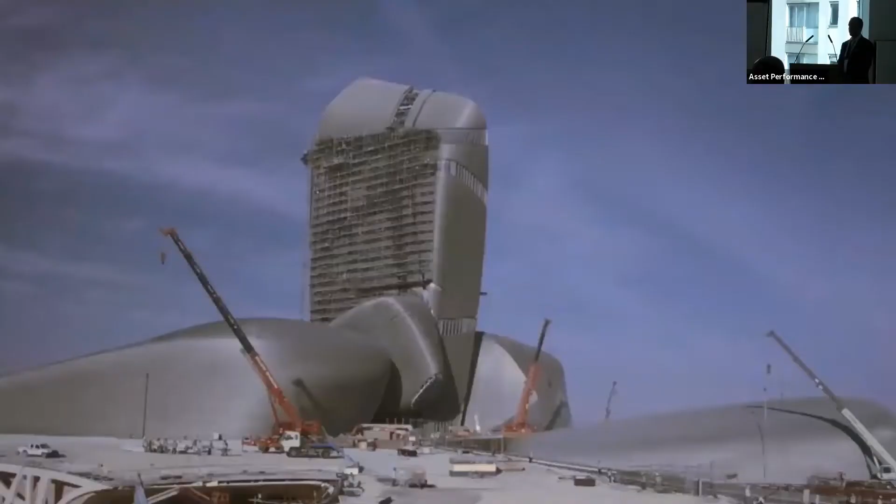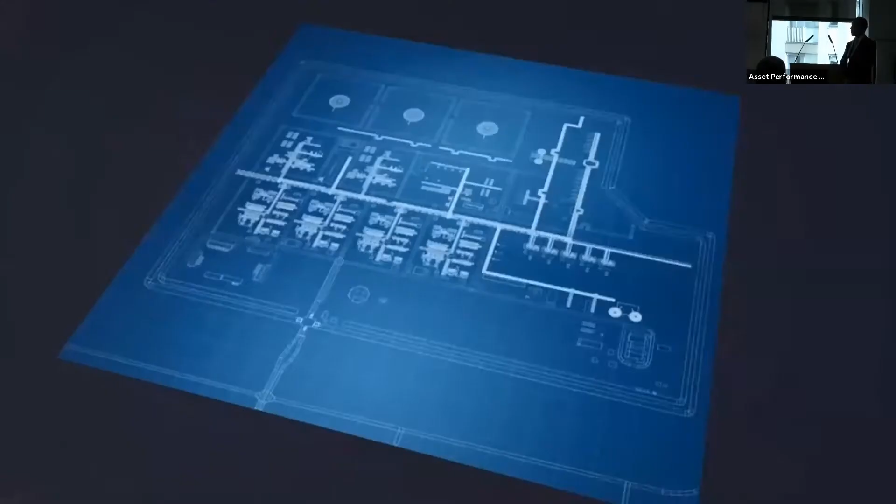Saudi Aramco is no stranger to the extraordinary. As the largest oil producer in the world, it is used to doing big things. The world relies on oil for energy and the thousands of byproducts that enhance our daily lives. Every day, millions of barrels are extracted from reservoirs deep beneath the Saudi Arabian desert. Demand is relentless, and thus the Khurais Central Processing Facility was built to enable the largest increase in oil production the world has ever known. The Khurais Mega Crude Oil Incremental Program.

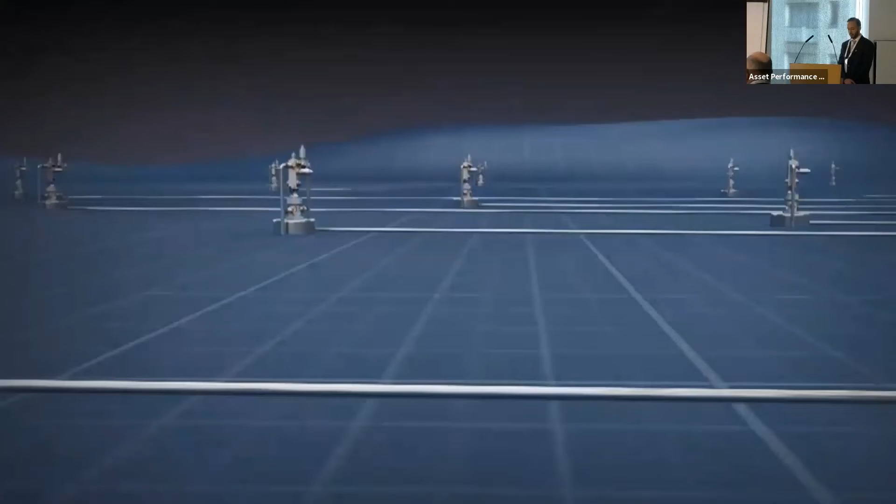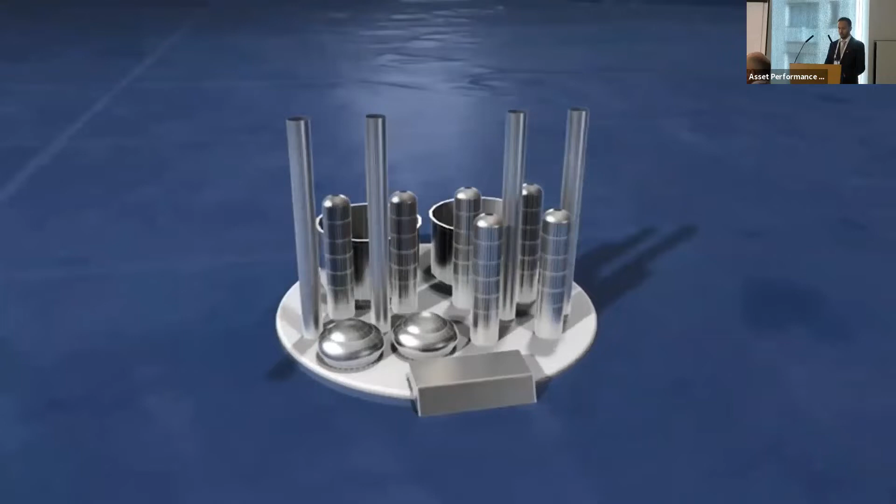The facility receives oil from 3 separate fields. The first field, Khurais, was discovered in 1957, followed by Mazalij and Abu Jifan in 1972 and 1973. These intelligent fields house over 300 advanced oil wells. However, oil direct from the ground needs to be processed before it can be used. Using the latest advances in technology, the Khurais facility was designed to process increases in oil production from the 3 fields at a single central location.

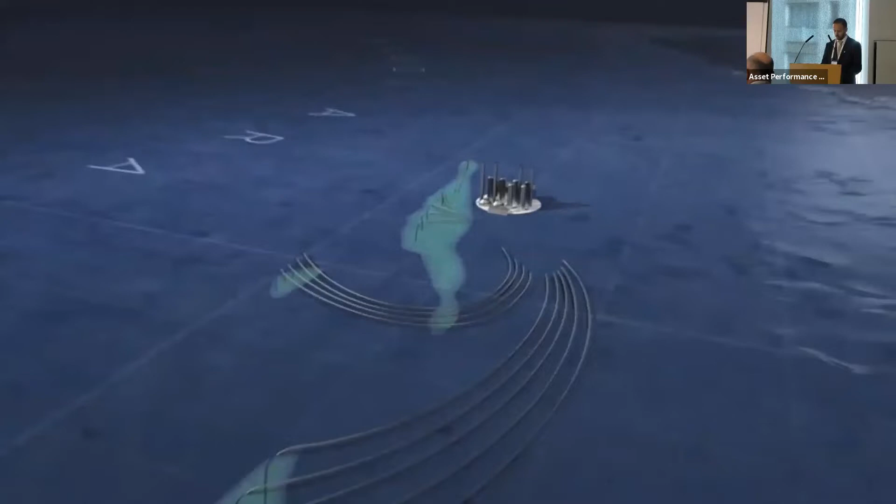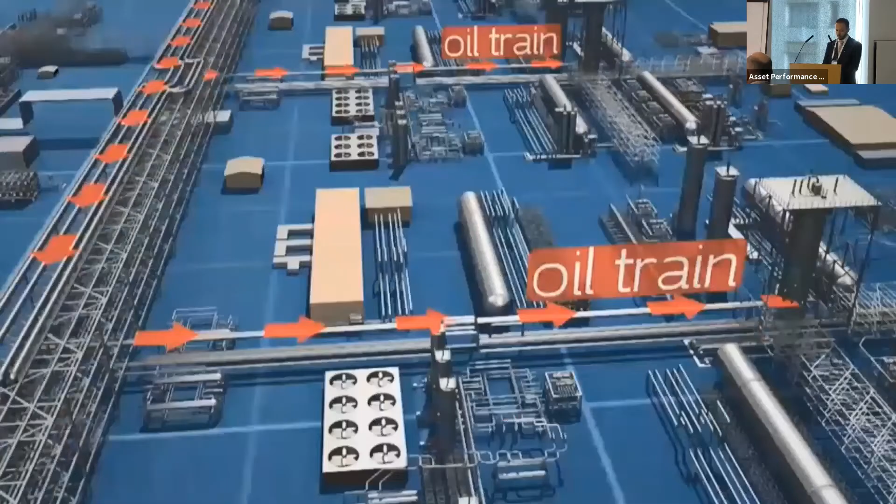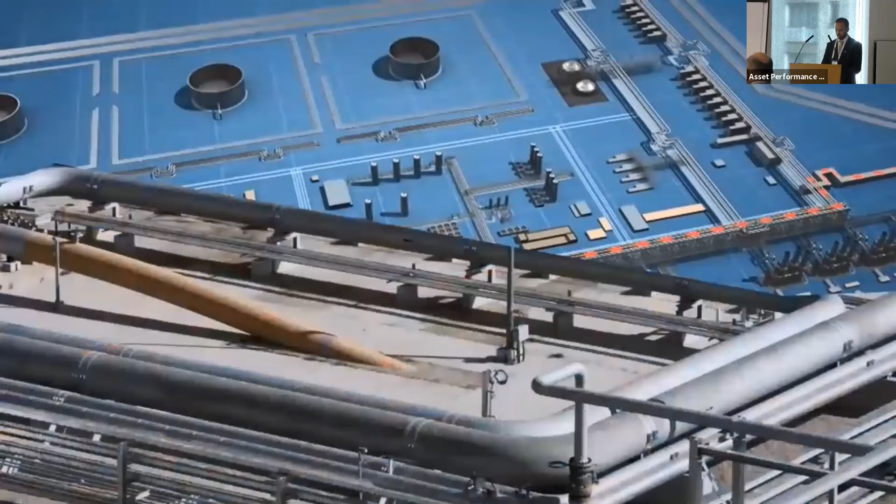Wild or untreated crude oil is diverted into one of 4 identical oil trains, where it is treated and separated into oil, gas, and water at our separation plants, known as GOSPs. Once stabilized and cleaned, this oil is piped across the kingdom to Saudi Aramco's terminals for export, while a strategic reserve of 1,800,000 barrels is held in 3 large storage tanks in the Khurais facility itself.

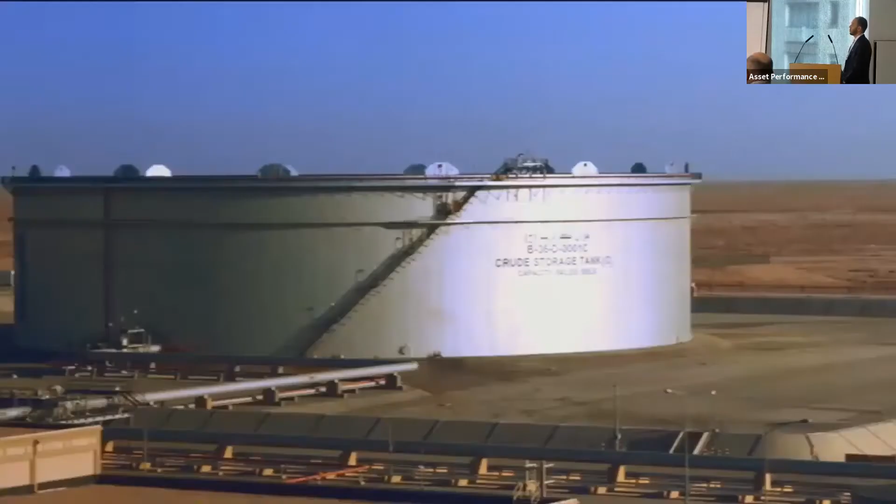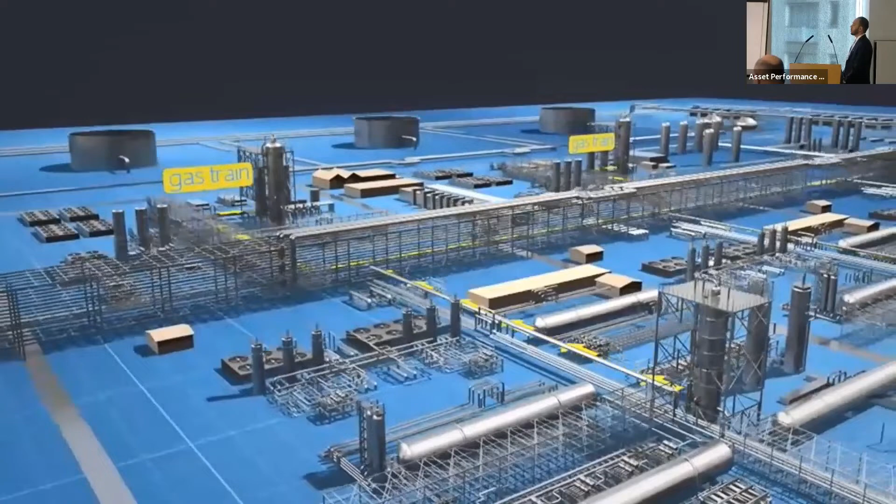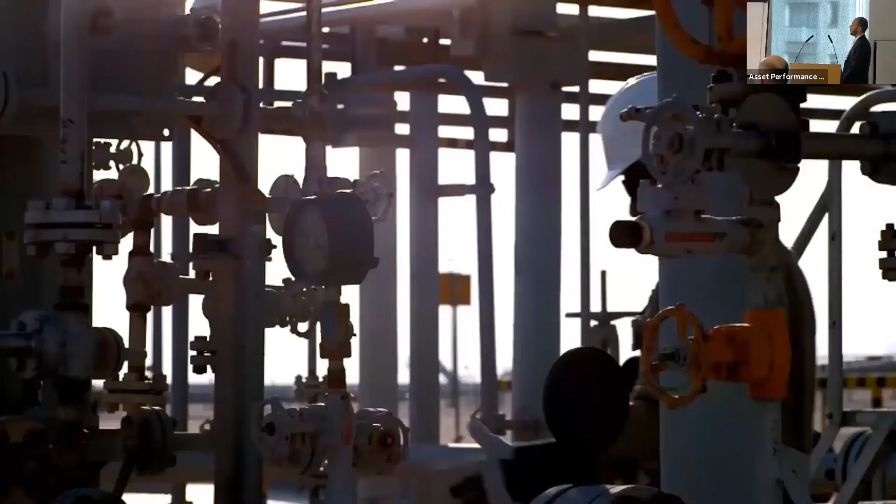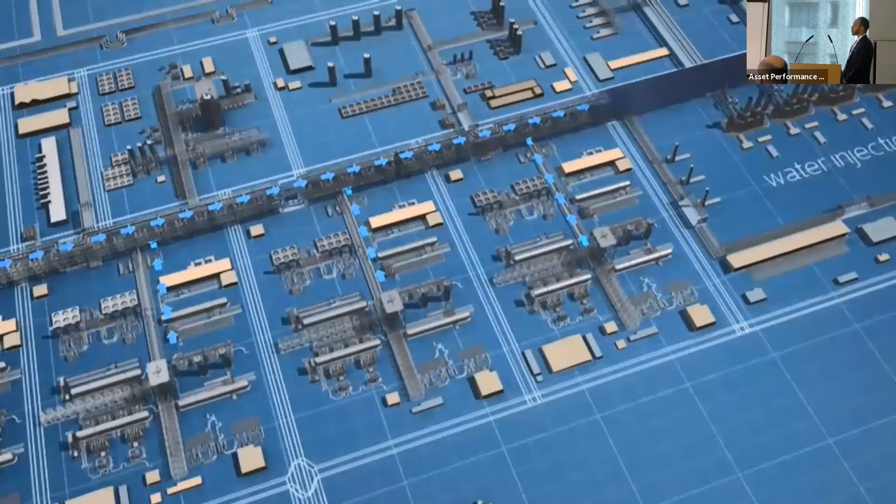Gas is essential to both the kingdom's and the world's economy. Known as sour, the separated gas is sent to 2 identical gas trains for further treatment. From this, around 320 million standard cubic feet is sent daily to Shedgum gas plant. And 80,000 barrels of natural gas liquid is piped to Yanbu on the Red Sea coast for further treatment. Any water that's thrown off from the crude oil is recycled and injected back into the reservoirs where it is needed to flush out more oil, allowing for substantial water conservation.

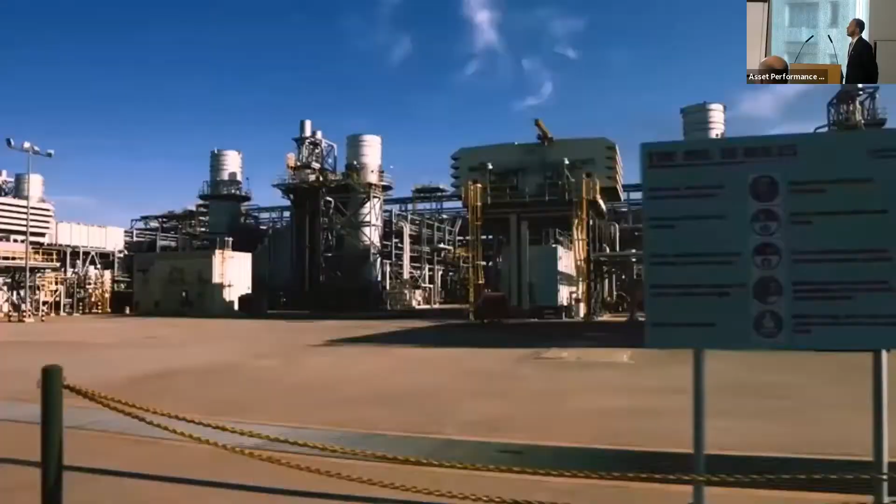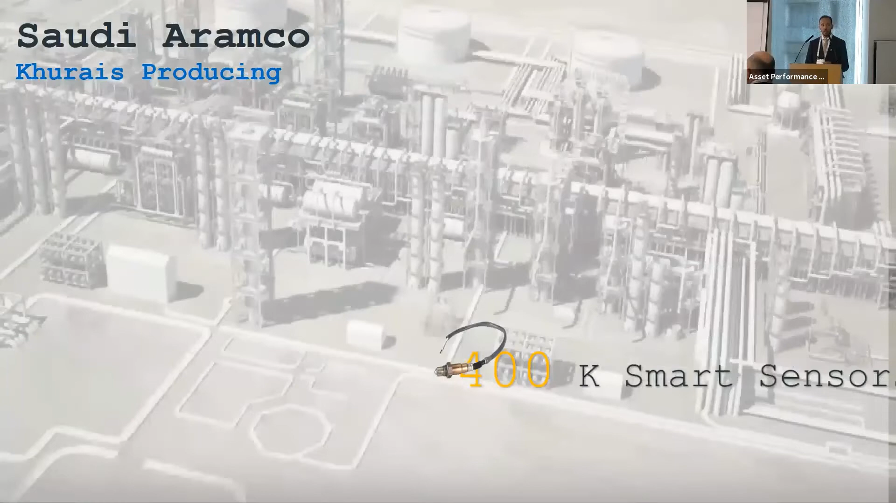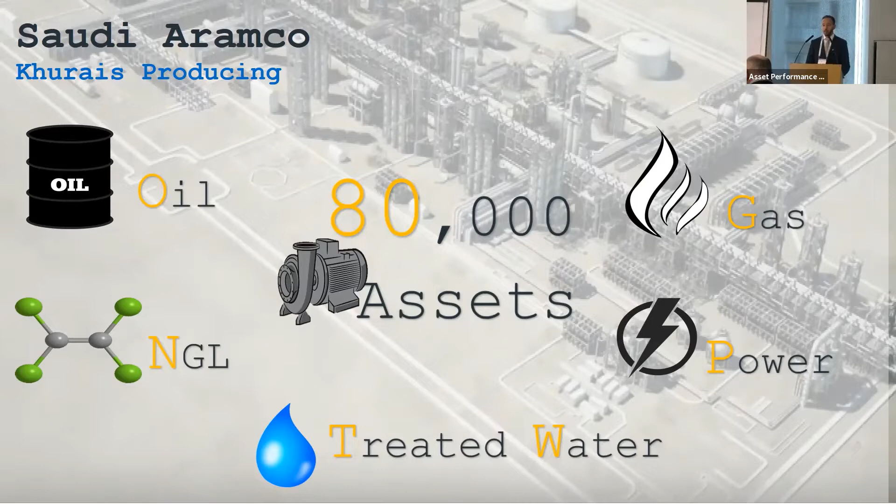So, as you saw in the introductory video, Khurais producing facility is a milestone in Saudi Aramco journey, where the potential and power of the 4th industrial revolution have been unleashed. So, Khurais facility is a gas and oil processing facility, where we process different types of hydrocarbons, also treating water and generating electrical power. These facilities and processes are operated by more than 80,000 assets, where each one of them has its own reliability program, which enabled us to achieve and sustain high asset performance.

As you know, maintaining assets in the oil and gas sector is not easy business. The oil and gas sector is challenged by different aspects, including the reliability of the plant, asset integrity, market demand, and above all of that is the environmental footprint. Despite all of the challenges, we have been able over years to achieve the highest results in reliability and asset management. However, we moved a step forward in the implementation of smart and intelligent solutions in our facilities and asset management in particular.

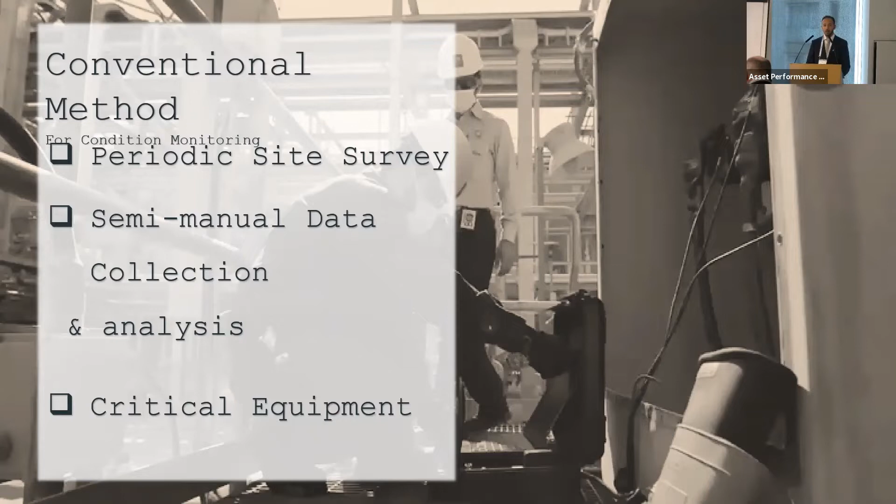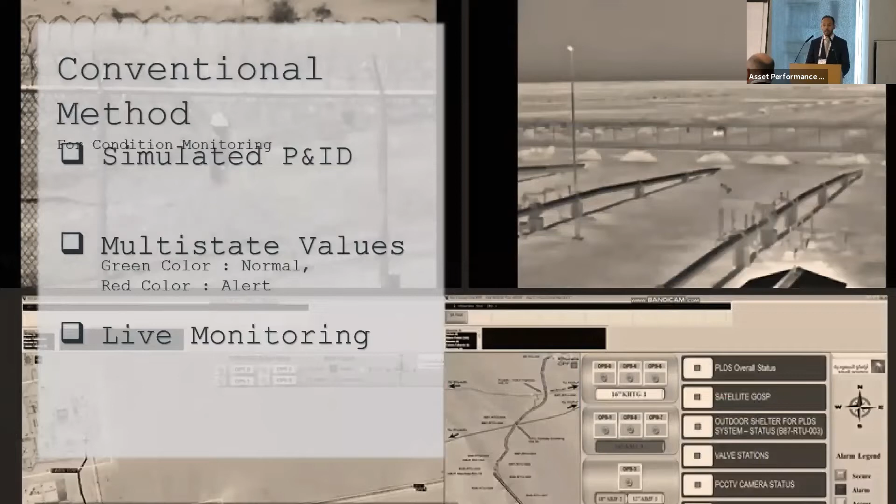But before I talk about the intelligent system that we have, let me share with you the conventional way that we used in the past. Basically, the practice was taking the data from the site and from different systems, and also conducting the analysis and reviewing all the inputs for the critical equipment. Also, we used the simulated P&IDs with the multi-state values, also monitoring the equipment through the screens and the panels. This was the conventional way. It enabled us for years to sustain a high level of excellence and achieve high asset performance.

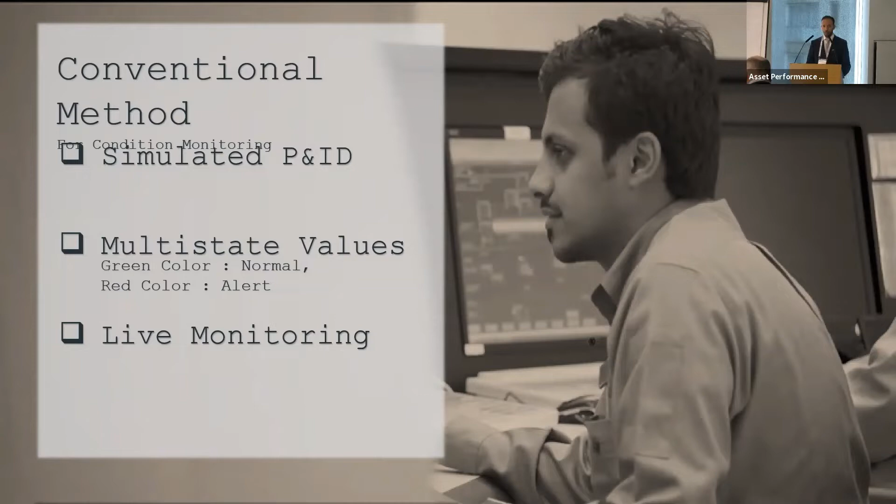Although we achieved great success in the past, we strived to explore and apply the latest solutions in the market and in the industry. So we established our Intelligent Reliability Center in Khurais, which we call the iK Reliability Center. This center works based on multiple integrated systems and dashboards, which provide fully automated monitoring and analysis for the raw data from the historian server.

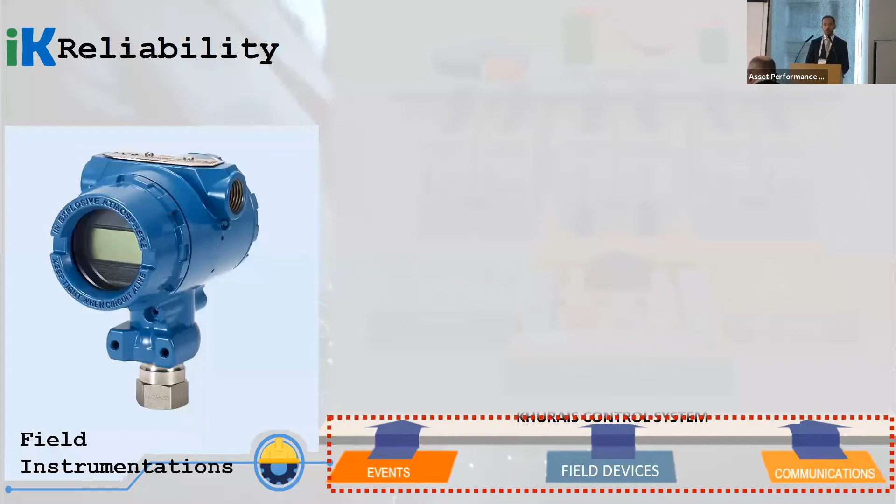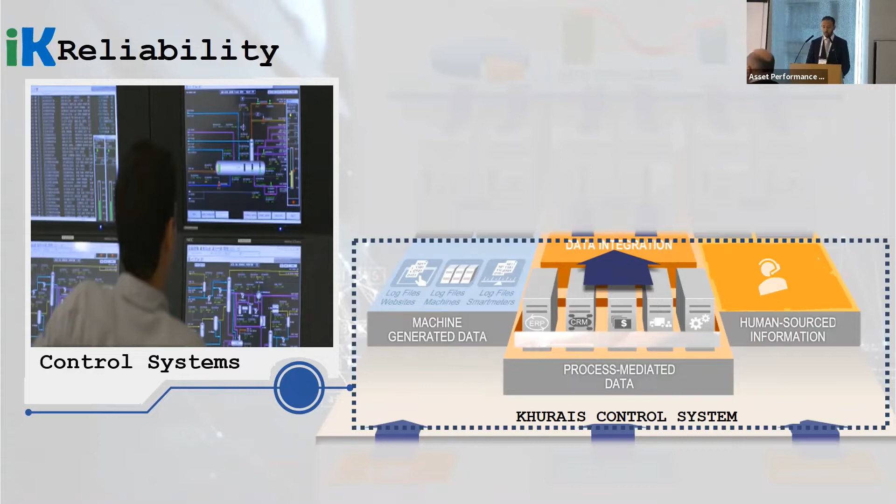So the data flow starts at the beginning from the instrumentation devices and sensors in the field. Next, it goes to different control systems distributed in the field. And after that, these data go to the historian server. So at this point, the Reliability Center or the IK Center we have established is enabled to read the raw data from the historian server and from different databases.

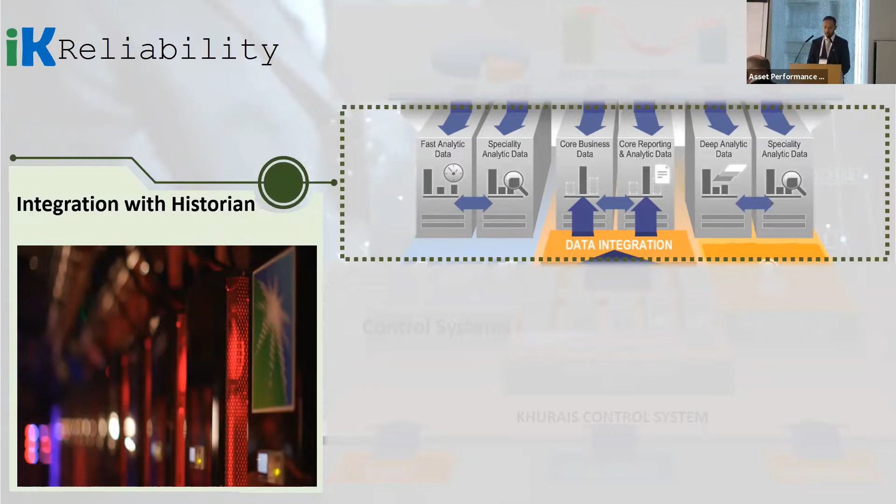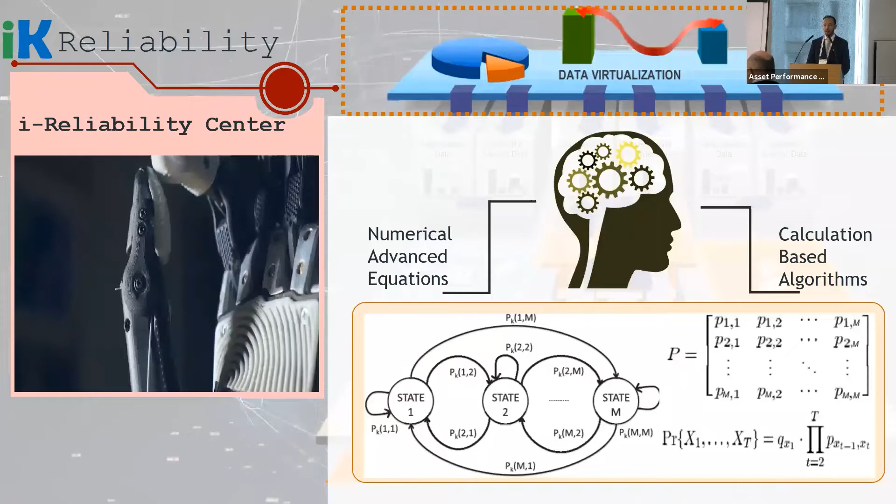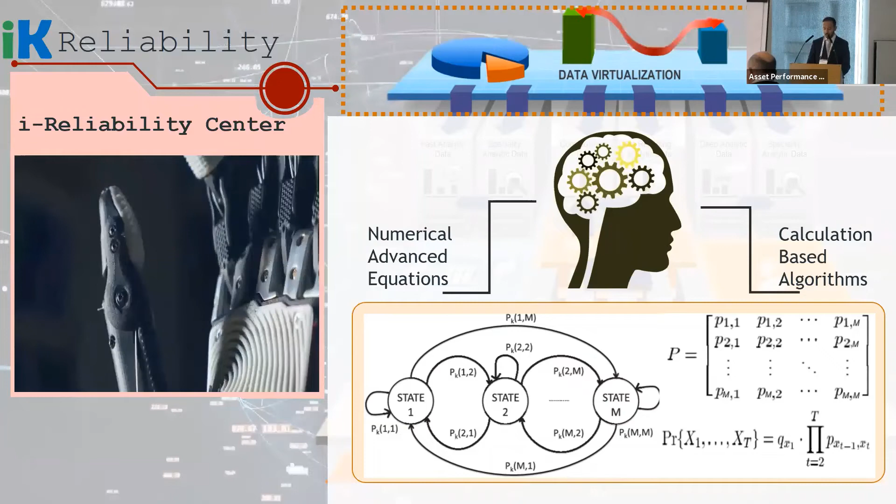So basically, the Reliability Center consists of multiple developed numerical equations and algorithms that were built and developed in-house by our engineers. These algorithms work together in monitoring the assets' performance and healthiness and analyze the raw data from different historians and databases.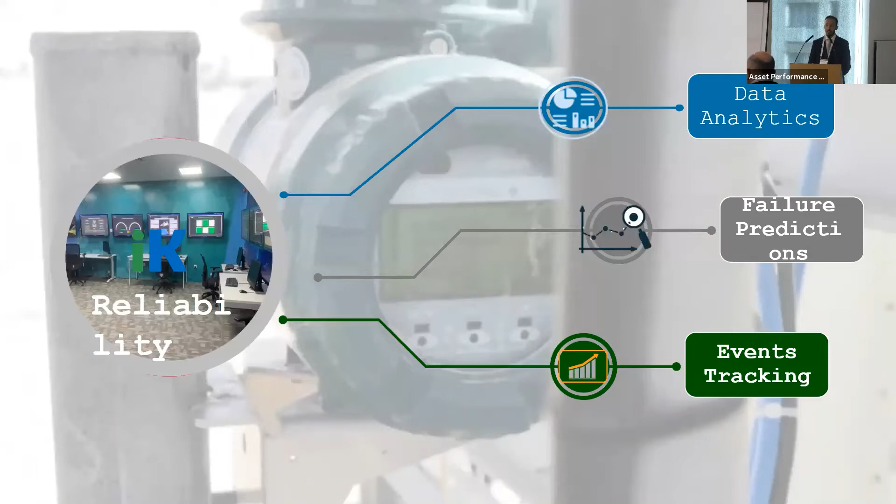The IK Center is leveraged with many features, and I'm glad to share with you some of them. First feature is the data analytics. Second one is the failure predictions. And third one is the events tracking. I will go over each one of them.

Starting with the data analytics, this feature provides a live monitoring and data visualization with extensive access to the data source that avail real-time assets information. This feature is supportive in optimizing the business processes. Next one.

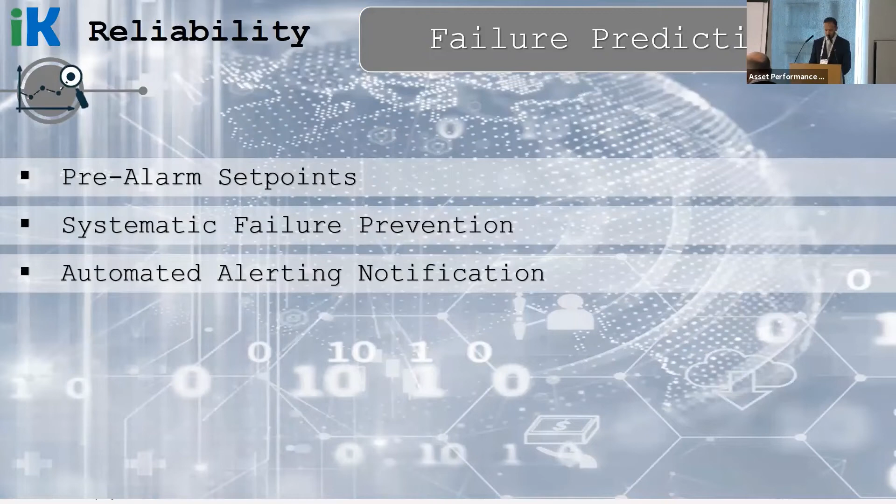And in the failure prediction, we managed to prevent many failures and avoid the consequences that might happen with each failure. And any abnormal behavior can be immediately reported and corrected, which prevented the failures from happening in many events.

And the event tracking, the IK Center is able to capture the critical events, compare the similar events, and give feedback for any undesired machine behavior. It also monitors the switchover compliance and the PM schedule for the equipment.

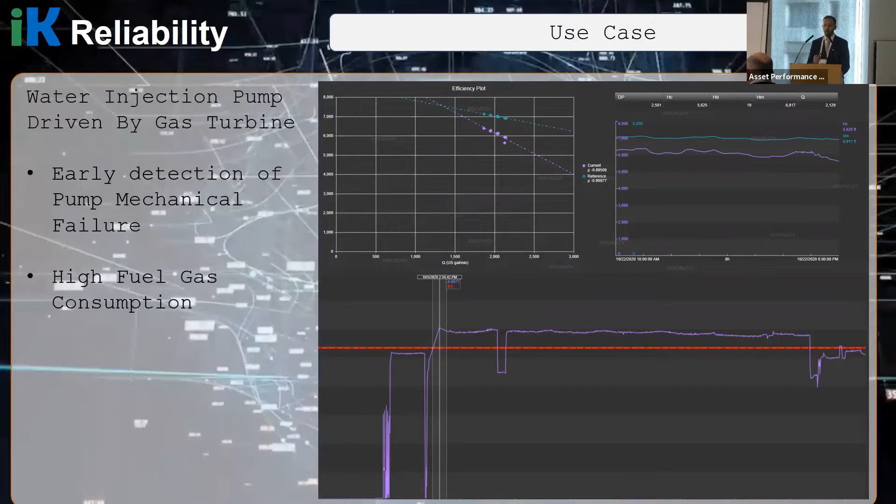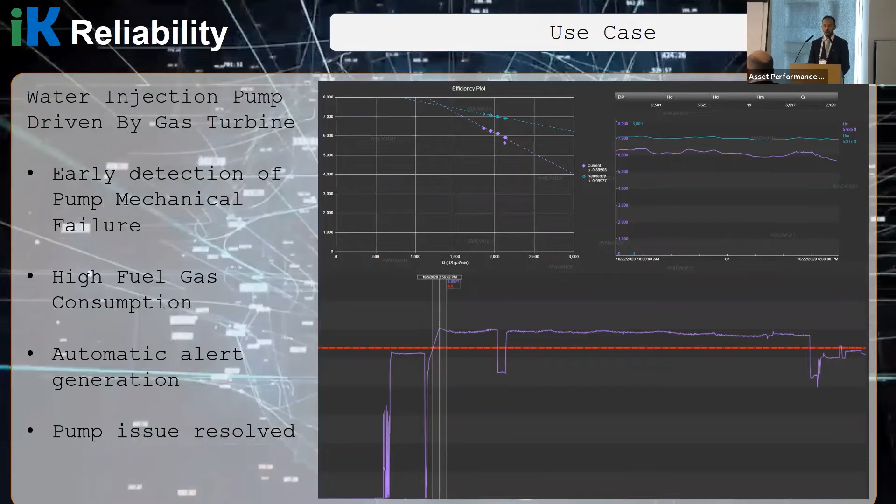Here I'm sharing some use cases or examples that we captured from the IK Center. This was for a pump failure that we had in the past. The system observed early stage of high fuel consumption. And this was because, as per the center alert, an early stage of pump mechanical failure.

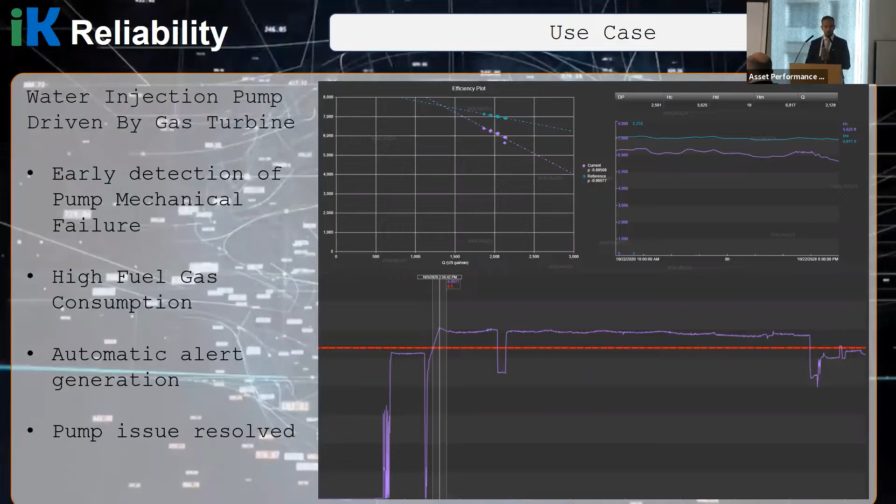So the system captured the high fuel consumption in the gas turbine, and this was linked with the pump mechanical failure. So this was detected earlier, and when we checked this, it was true. We found the pump in early stage of mechanical failure. This was corrected, and it was returned to the same level of mechanical performance with the minimum maintenance cost.

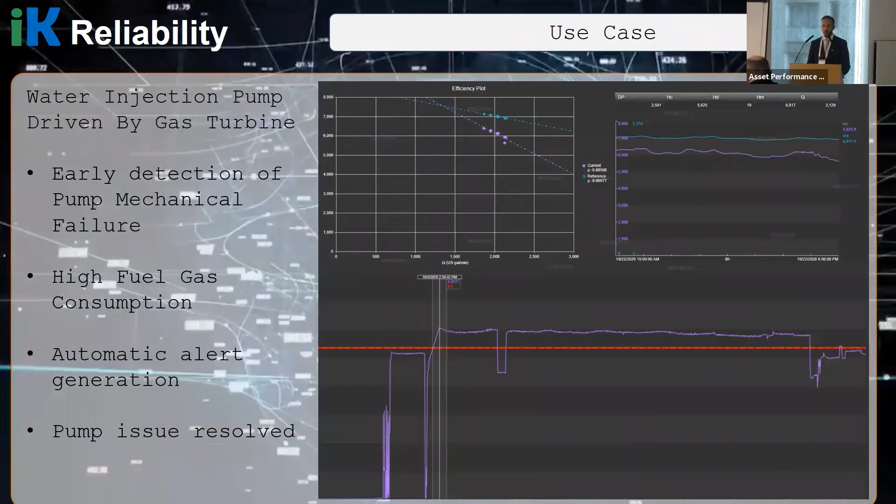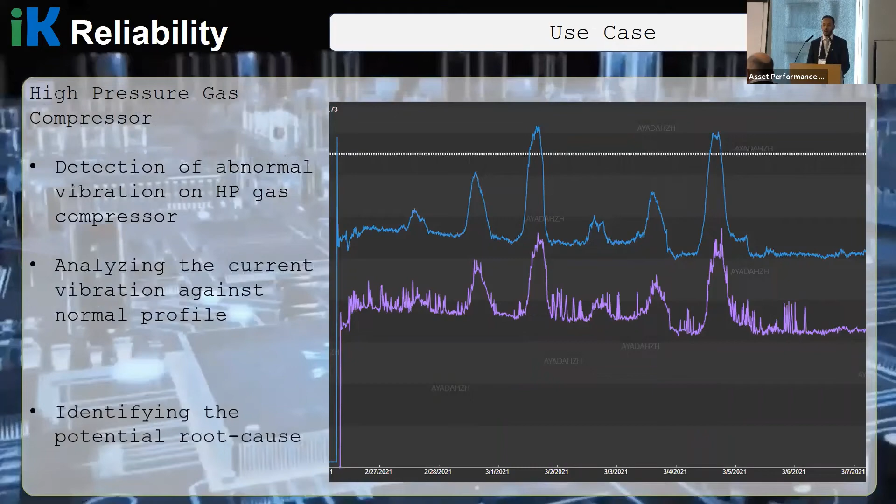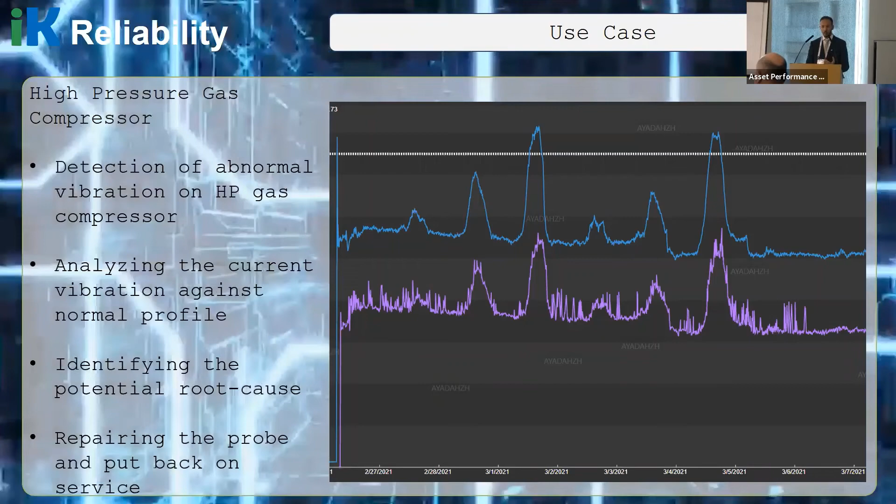Another example is for the high pressure gas compressor. The center also observed the high vibration, which was above the normal. It didn't reach the alarm point, but was abnormal vibration. So this was reported, and we received an alert about this issue. And the center also identified the root cause of this.

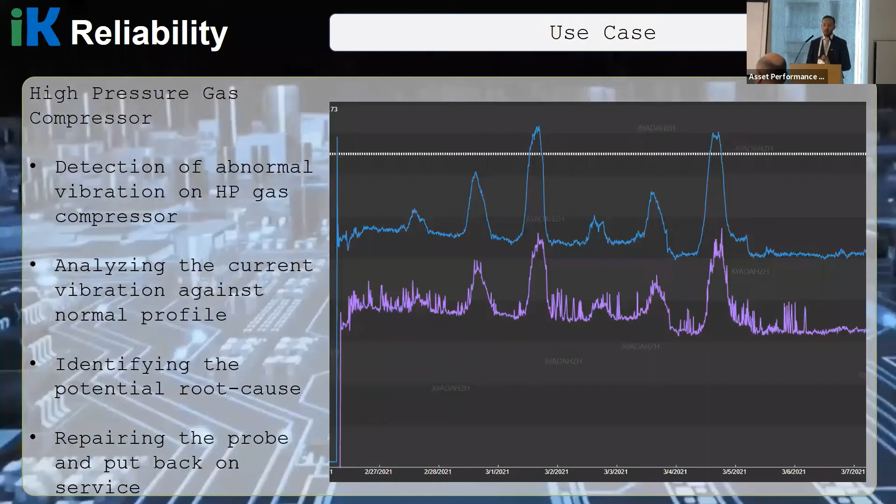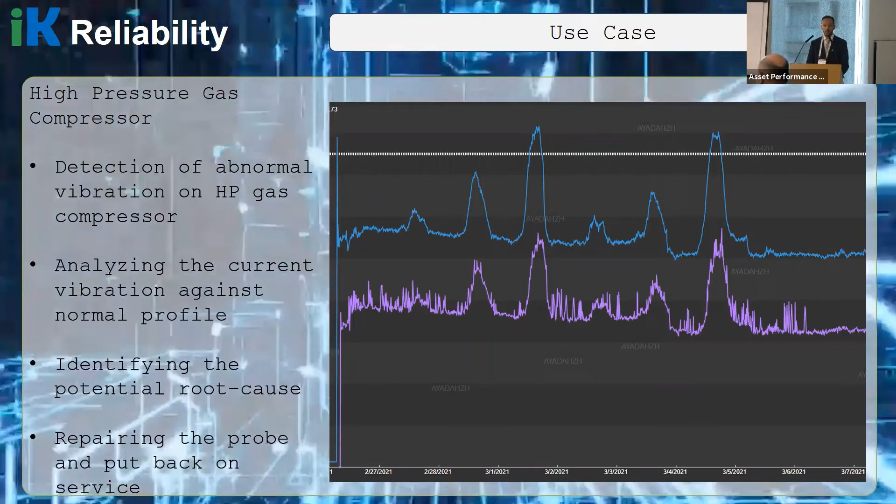It was instrumentation probe failure. There was no real vibration. It was only instrumentation. So this was fixed, and the vibration went back to its normal parameters without any issues in the compressor.

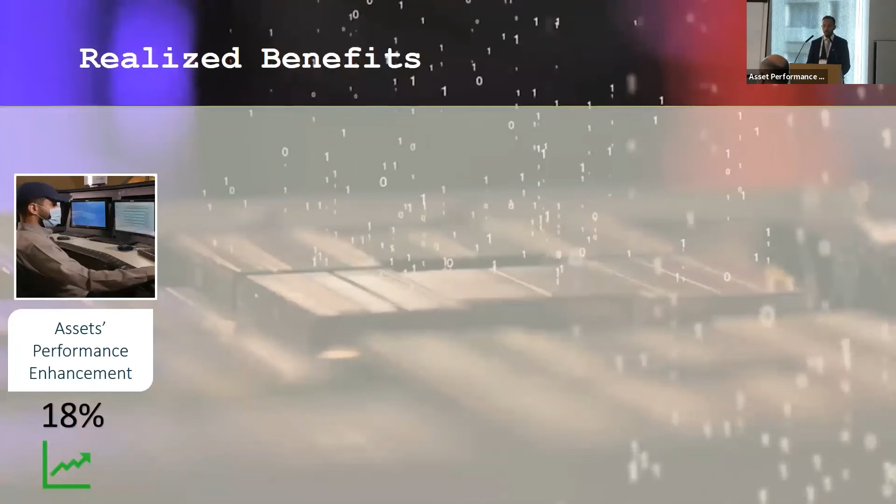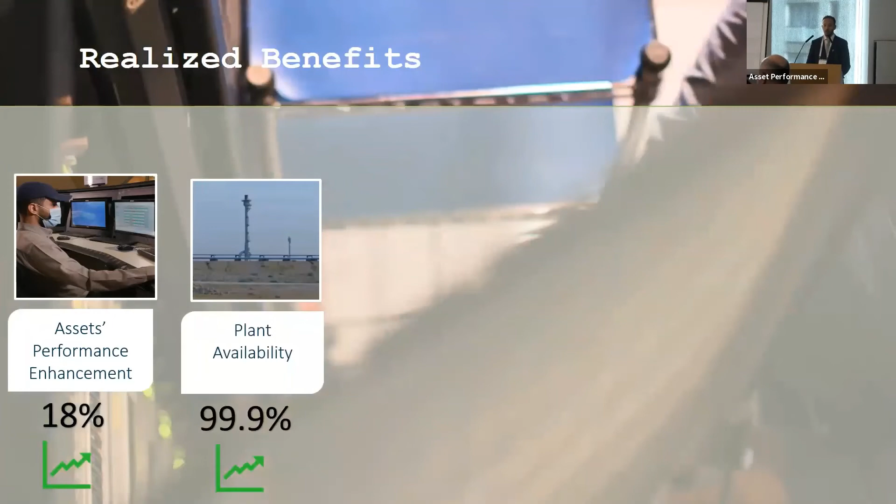So there are a lot of realized benefits captured from the IK center, and these benefits are at the top of the industry standards. So here, allow me to share with you some of these captured benefits that we have realized. We have observed the improvement in the asset lifetime. As you see, 18% improvement in asset lifetime. And also, our plant availability was almost 100%. This is a very tangible and remarkable result of the implementation of the IK center.

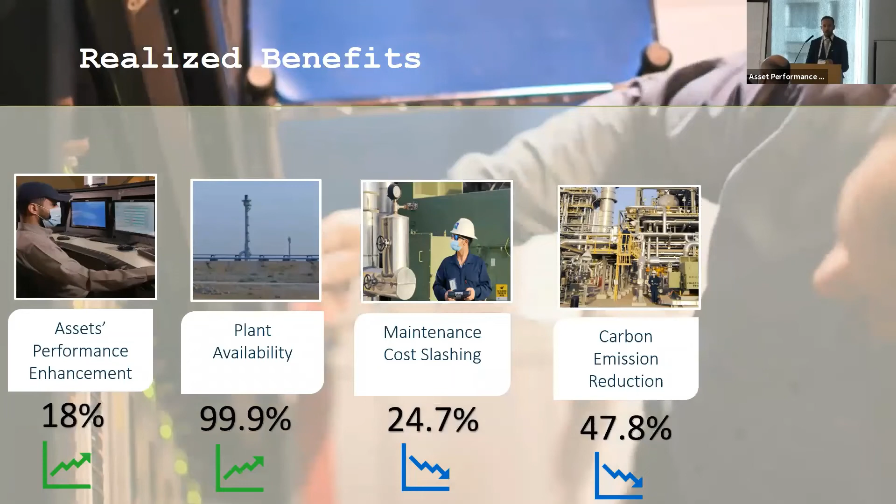Also, we have noticed reduction in the maintenance cost and the carbon emission. This was very helpful to control the maintenance cost and also reduce environmental carbon emissions. Also, this was reflected in the overall maintenance and reliability KPIs with 12%. We were good. We were achieving high KPIs in maintenance and reliability, but with the implementation of the IK center, we have achieved these improvements and realized benefits.

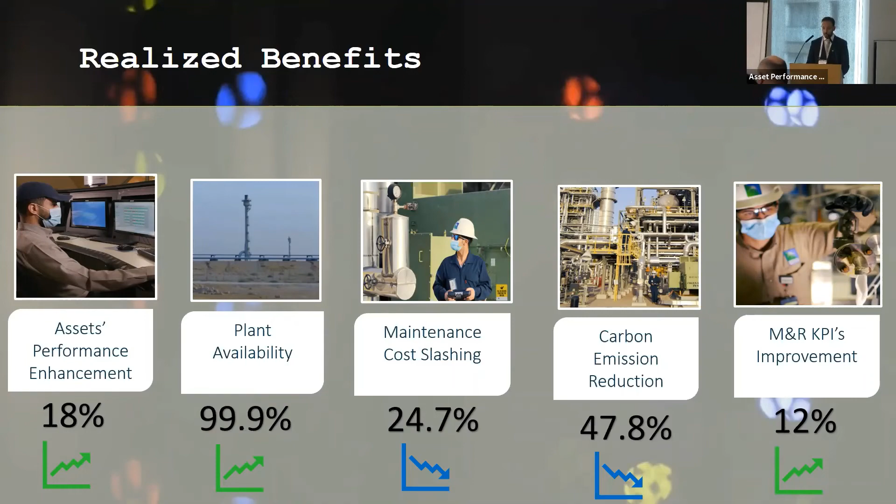The advanced technology deployment at Khurais has been so significant. The IK Reliability Center was one of the major contributors for winning the World Economic Forum Award in 2020. We were honored to have our facility described as a smart digital lighthouse facility, the only one in the Middle East.